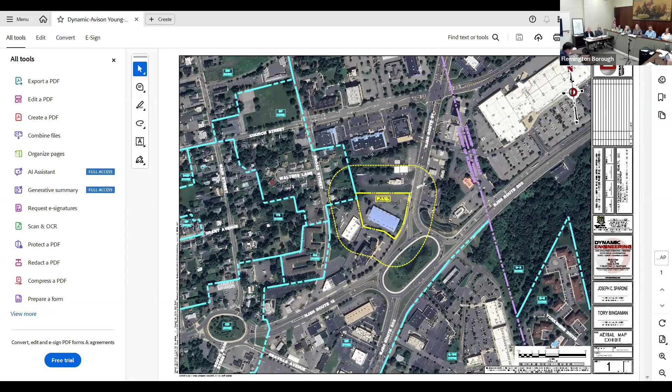So again, referring to this exhibit here, oriented with north toward the top of the plan, what you're seeing is the property in question outlined in yellow with a 200-foot offset to demonstrate proximity to those adjacent uses. The property, as Jeff described, is located at block 43, lot 9.01, at the address 3 Route 31 here in the Borough of Flemington. We are in the highway retail district, and the site is approximately 2.19 acres.

Looking at some of these adjacent uses: to the north we have a Wendy's drive-through. Immediately across Route 31, we have a building supply commercial user. To the southwest, we have the Flemington Circle itself; to the south, we have a commercial professional office development, and a second one towards the southwest. Then in the top northwest corner of the property, we have existing residential to the rear.

In terms of conformance in this existing condition, Jeff already notes some of the existing floor area ratios and impervious coverage relief that's going to be discussed further, but also want to note at this point there are some front yard and rear yard setback variances which are going to be remaining unchanged as part of this application. The site itself is a former Dansk shopping center. The property is currently vacant, run down, and generally unkempt as currently exists.

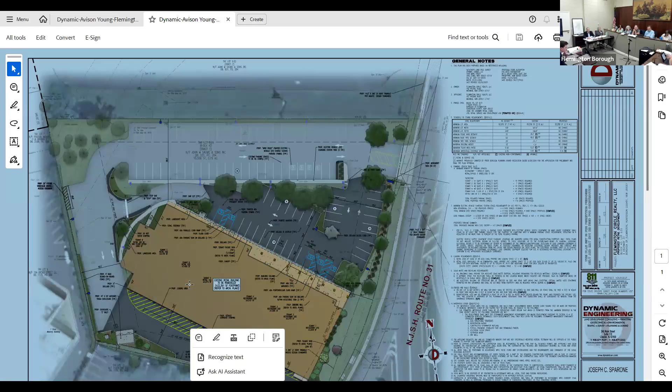In terms of connection to the Wendy's parking lot, what I offer is, I'm not recommending a connection between the parking lots at this time, so vehicles from this shopping center are going to enter into the drive-through. It's in the event that the Wendy's may be redeveloped for something that doesn't include a drive-through, or at least in that area, that there may be an opportunity to connect the lots to give pedestrians or vehicles the opportunity to access the neighboring site without having to go on the highway.

So I wanted to raise that for the board's consideration and for the applicant's reconsideration about connecting to the north and also to the south, in the event that the Plaza One site is redeveloped and of course the grading is redesigned to accommodate access.

I mean, for the rear, we have a 2 to 3 foot grade differential, so are we only talking about the front, the top? I think they should be taken separately. Tory, the engineer, do you want to address the first, the top one, Wendy's, and where the...

I know there's a handful of existing easements already that we'd have to confirm any restrictions associated with, for the rear. Again, we worry about losing parking, that's right, that would be the other concern. Right now we have additional parking on the site, but with this tenant, that's still to be confirmed. We afford ourselves that flexibility here.

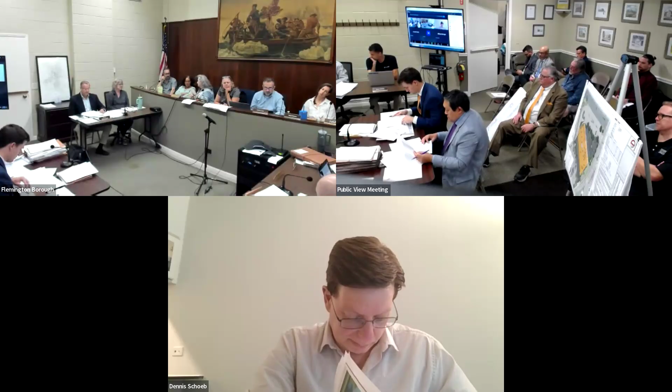No, wait, excuse me, I'm on the wrong section. 13C, number 3B at the bottom. That would be along the lines of, bioretention would be along the lines of the vegetative filter strip.

And we can discuss these one by one and see if any of them are feasible. I guess what I'm just saying is, if we go look at 13A, B, and C, as you've easily outlined, what their three options are. They're not gonna be able to do A, because they can't get it under 50. They can do B in certain situations, which would be something like the garden that they're proposing.

Their position is they did B by doing the analytical approach. I'm questioning that - if they did that, if they checked all the boxes off, did they really qualify for that? Again, I was just throwing that out to the board because we haven't seen an applicant who's just come in. And ultimately, if they can't do anything, then they could get relief from this board from those particular provisions. I think underlying this, they could always seek relief from the 20% reduction, because analytically they did that modeling, so they can prove to us.

Yes, I think if we're gonna rely on that, then I think we should go through the stormwater report and discuss each one - what it is, did you really hit the target, or is there something else you could have done? Again, so it's a little bit of unknown turf here, because no applicant has ever tried to do that before, so they don't have a history on trying to do that.

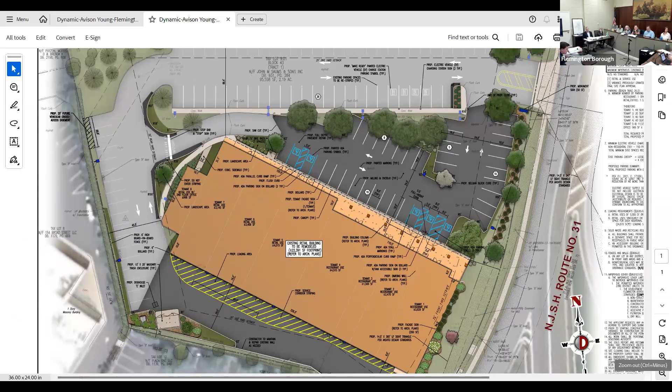Would the applicant consider making a donation to the borough to put other trees in other places instead? Is there a tree fund? There is a tree fund and you have the choice. So if we could have either choice - plant them at an acceptable location, or make a contribution - would that be acceptable? I don't know if we allow you to plant, that's up to the DPW superintendent, whether or not they'll allow you to plant them elsewhere. I would prefer just the contribution. Okay, that's fine, we'll accept that.

And we would like to see - I mean, that's a heat island - if there are places to put additional trees, I'd prefer that as well, just a few would help. Maybe we'll work somewhere. I believe there were recommendations for some additional landscaping, which we were going to use. Maybe work with professionals on that.

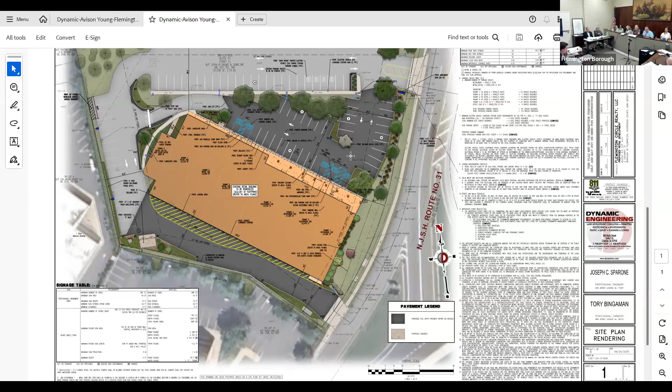So we're very concerned about that, so we'll try - obviously we'll do the best we can to use native species of tree and see how many we'll fit on it. Sound good? Perfect. Dennis raised that and started that conversation, so let's go back to Dennis, see if he has anything else. Nothing else for me. Okay, great, Melissa? I had questions about the plantings, but I think we pretty much answered all of my questions.

Mike? I'm good. Okay, sounds great. Anybody else? Mine were covered, I think, under the engineering report, yeah?

Yeah, so one other thing, item 16 with the roof leaders. You indicated earlier, if you don't have an inclination to want to do drywells on the property, how do you intend to discharge them?

They offered an alternate suggestion. Currently they discharge into underground. They do. Where do they go? We need to confirm, I think it's part of your comment 14, we intended to determine that discharge point for those.

And item 15, what do you intend to do with that inlet that's gonna be sitting at the high point? In rearranging the site, there was an inlet from the original development, I think that was an access point out to 31 that got eliminated when they redid the circle. In their prior plan, it was an inlet sitting in this low point in like 2 or 3 parking spaces. In rearranging the parking in this area, it's now gonna be at a high point, so it's not gonna really serve a purpose.

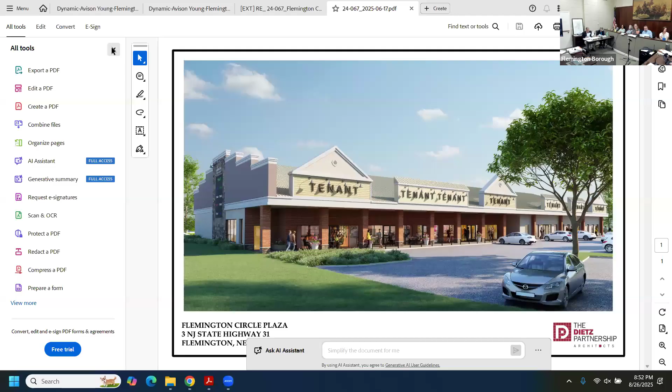So if you could, Mr. Dietz, in the narrative, hit a couple of things: describe what the facade treatment is, what we're looking at, what the proposed renovations are. Also hit upon the signage and the variances that we're requesting, and then confirm the ADA compliance as well.

Yes, I was hired approximately 2.5 years ago by the applicant. I'm sure everybody's familiar with this project and the disrepair that this building is in as we sit here today, so I certainly had my hands full when I took this job on. I think the two major things I'm looking at is this is not just a facade renovation, it's a beautification of a project that's been long overdue for a remodel and cleanup of many issues of just age and wear and tear.

The two main features, in my mind, is the roof change. It leaks, it's a green standing seam roof on this wood truss building. The green style and color came in probably mid-80s and went till about the mid-90s, and I was just a victim of designing buildings with that. I've spent the next 25 years changing it, so I believe I'm offering a wonderful color, it's classic, it's easy on the eyes. It's called champagne. That will be the new standing seam roof that'll go on after we take the old green one off, which will hopefully solve many of the leaks currently in the building.

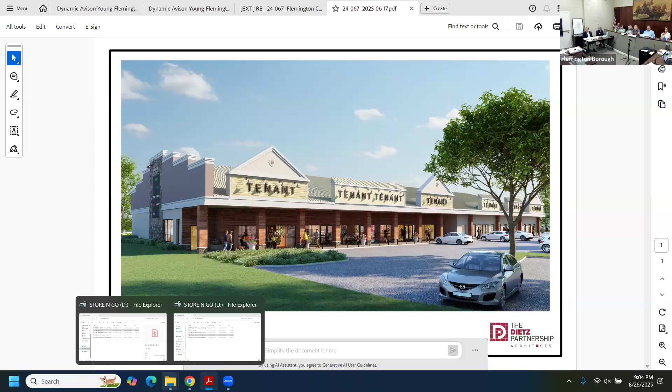Let's mark it. So A6 would be the materials and color samples, and then A7... well, it's actually we've done 5 already. My sheet numbering is always a problem because the art always starts with A. But were these already submitted? No, I think we didn't get these in, these are part of the comments. Okay, so we're going to mark as A6, architectural sheet A5 — or do you want to do A6 first?

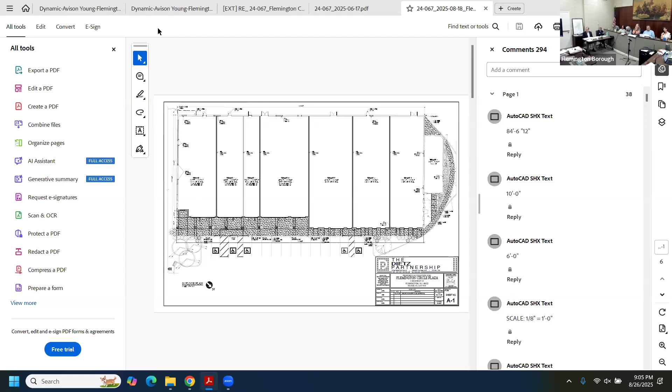So A6 is actually the materials. Yes, so that should be A6. That never happens. Wow, alright, you were prepared. Architectural sheet A6, alright. And then any date on that, A6? Today's date, the 26th. Alright, and then A7 is architectural sheet A4.

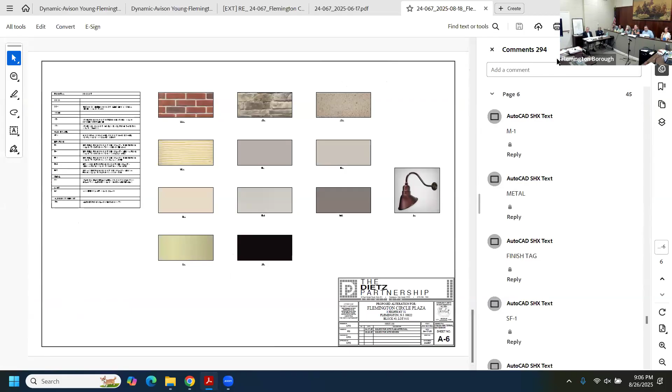It's A4 and A5, the elevations, just with the finish tags on them. So they're the elevations with finish denoted. With finish denoted, and today's date as well. Are those new drawings from the submissions or just updated drawings? They're just updated with the tags, so the elevations are again... are they A4 version 2? We could write that down. No, these were in response to the comments, so we added.

Here's the same front elevation, but with this — this HP1 is this part. But then this same elevation now tells you what the material is. It's brick 1, stucco 1, 2. And what's on the flash drive are these, correct? Correct, so you should have everything.

Yes, so which sheet are you talking about — updated those sheets, or are those brand new sheets? I dated them today. Updated. We updated from the original submission. Correct, so they are updated versions of those, not brand new. Correct. Alright, now you've confused me, because that's entirely different from what I said.

So, okay, A6 is the materials and color samples, also referenced as architectural sheet A6, with today's date as a revision date. The original date was April 17th, 2025, and the last revision date was 8/26/25. Okay, let's do the same for A7. A7 is architectural sheet A4, A5, elevations with the finishes on them, last updated 8/26/25, but originally dated 4/17/25. Okay, thank you.

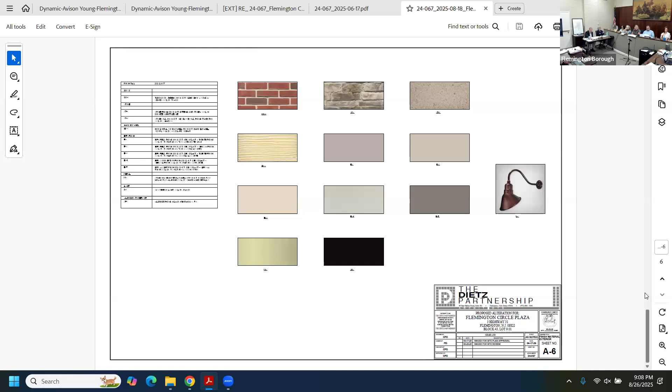Nice, yeah, thank you. I have a couple questions. First, I'm sorry, I missed your testimony regarding the mechanical equipment on top of the roof to the rear — is it that you can't screen it because of the structural loads? Correct. The equipment will remain where it is today? Correct. But was this ever submitted? No.

So Dynamic was nice enough to put the pictures on a board that I didn't have to do. So he has a sheet, sheet 1, dated today, that has photos of the existing center. So if you want to mark that — okay, was that in the photo report?

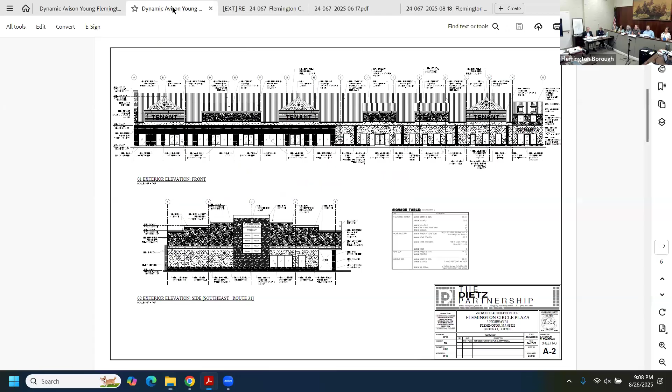They should have been part of that package that was sent. Okay, I have a photo report, they're taken from the photo report. Okay, so then it's yeah, okay, don't have to mark it.

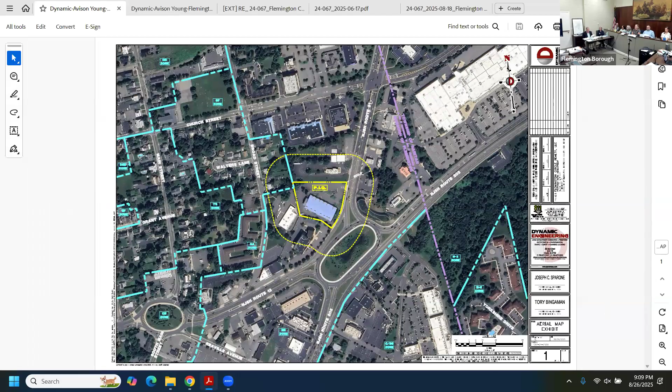As you can see from this photo, it's not... alright, sorry, let's just mark it to be sure. The photos are a little bit different. A8, existing conditions photos, I don't have that on. I don't think so. Here, just one second. Is there a date on there today? Today's date. Alright, camera, tuck the other way, I'm moving.

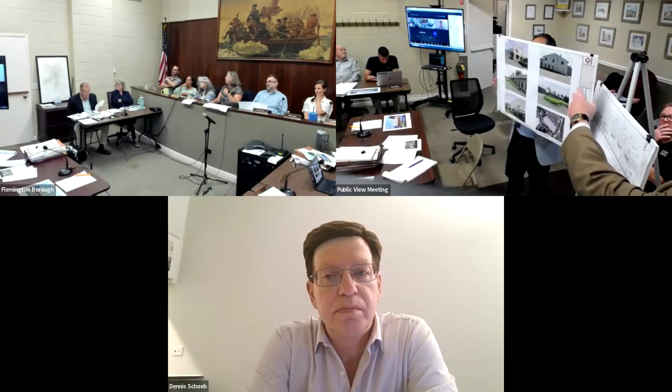Photo 1, upper left, shows the existing parapet, then it shows all the rooftop units sitting on the platform. You can see they're way lower, 3 to 4 feet below that parapet. We're going to reuse those platforms and maybe add a few more when we put the new tenants in.

My testimony is they'll be screened just like they are today. So unless you're directly behind this project on the backside, yes you'll see the units, but from the parking lot and most of the street you will not see these units.

Are you unable to provide screening along the rear of the building because of that structure? Same reason, correct. I could not run it continuous and let it stop, you'd see through, you can see how many there are, and we're going to have at least that many going forward.

But would your testimony also be that they wouldn't protrude above the ridge of the roof? Correct, they'll be contained within, visually, the roof. And always behind the parapet - that's what I did, I updated this parapet, played with the height.

So with this parapet in place, you won't see them from that part of Route 31. They're lower than the roof, so you won't see them from the Wendy's side forward.

What about the residents who live behind it? If they're directly behind, they're going to see exactly what they're looking at, or have looked at, for the past 20+ or 30 years.

They don't protrude above now, so they're within view. Also, the residents' view is closer to the diagonal, I believe. Yeah, they won't see the rear of the building. They're closer to the Wendy's side, so they shouldn't be seeing it now, and it won't affect them.

Again, that was my first inclination, before I knew it was a truss - I was going to run a whole new parapet across the front and the back and put my sign in. We got inside, found out it was wood truss, the structural engineer said nope, not happening. So we came up with a different design.

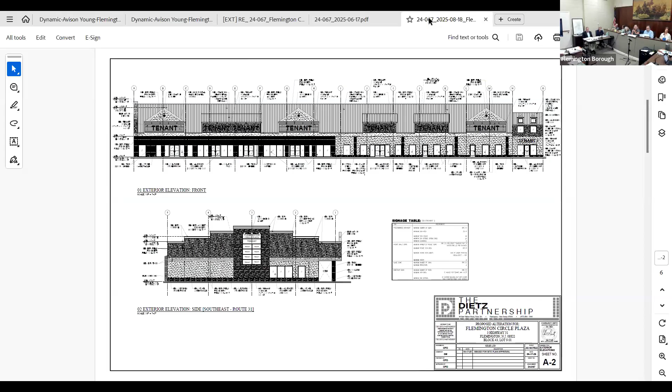For the maximum facade sign, there are several requirements. They are permitted 2 signs per tenant, and they comply with that. They have 1 sign per tenant facing the parking lot, and then an additional sign facing Route 31, so they're compliant with that. When you say additional, facing 31, are you talking about the one shown on the side of the building? Yes, the wall sign — it sort of looks like a freestanding sign, but it's on the facade.

In terms of facade area, the ordinance permits up to 100 square feet. Facing the parking lot, they have 396 square feet. Facing the circle with Route 31, they have 201 square feet — that's the individual sign with all the tenants listed. The parking lot side has obviously individual signs for each tenant. For maximum facade sign length, it's a maximum of 50% of the frontage of the tenant space, and they do not comply — but only facing the parking lot, for both length and size.

For maximum facade sign height, it's a maximum of 4 feet, and that is non-compliant facing Route 31. So to break it down: for the parking lot, it's the area and the length of the signs; for facing Route 31 or the circle, it's the height and area of the sign.

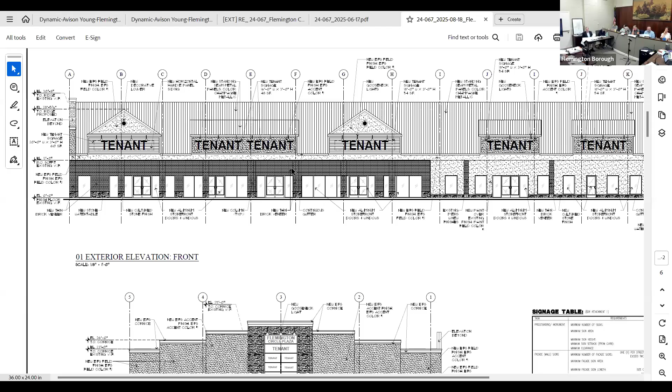I'm clear about that. The dotted box is what we're allowed, we just didn't stretch the proposing tenants to be able to have signs that fill the entire box. And the measurement is based on that box. I understand, but the distinction I want to make for the board is when you look at those words 'tenant' over each storefront, there could be a larger sign there, filling the entire box of the parapet, not the whole thing, but the dash line around the word tenant.

So I think the board should take that into account. It is shown on the plan, yes, but the calculation is for the dotted box. So the sign doesn't get any bigger square footage wise, it's just that we don't like to stretch it because then it gets asymmetric.

Kind of, not to have too many letters. Yeah, the tenant could have 8 letters. Yeah, exactly, something like that. But thanks for pointing that out, because my concern is that's assuming the tenant would come in with a rectangular sign. If they came in with something else, what then?

One of the other questions I meant to raise was the type of signage proposed on the front — is it proposed that all signs shall be channel letters consistent with what we see here? Yes. Good, because that's going to mitigate the size of the sign, since you don't have a big box. You have a height restriction, so they can't go above 4 feet.

We didn't even design those mansards to be tall enough. But you're proposing individual letters, not a box. If you have one tenant with 6 words in their name, they still have to fit in that box. Yes, I just want to be clear, it's always going to be individual letters, as opposed to a single sign panel that's fixed. I don't like box signs.

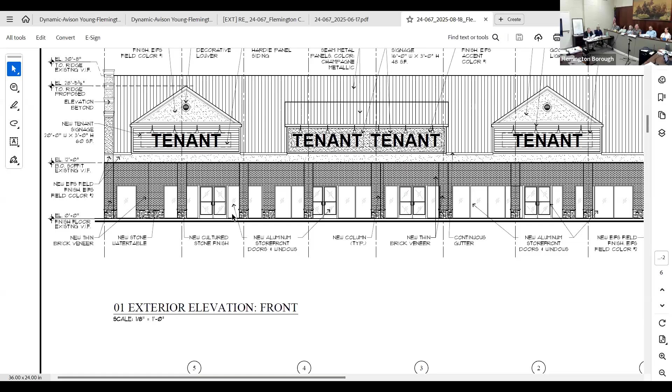I'm more willing to deal with the parking lot signs, because I do feel like they're trying to be conforming in terms of a tenant. The circle facing building facade is very large, and their submission drawing here has 9 tenant slots.

If we bring out testimony, it's only gonna be 8, so that could be scaled down potentially. I do like what they're trying to do in terms of bringing all the signage into one thing.

But I just don't know how they're really committing to reducing the size. And if you're coming off of 202, and that's a long stretch, and when you look at the Google view, there's big signs all over that front right now.

Just trying to compare. We have to look at what's before us, we have to look at that proposal. I mean, it is quite possible.

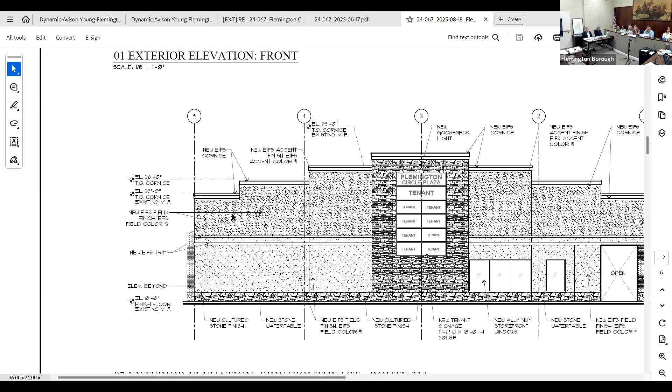They are trying to maximize, trying to be consistent across the board with each tenant, and make the box the max that it could be and ask for that relief. It's quite possible that they're gonna have people come in that are gonna be less than that.

So when you measure, Beth confirmed, you measure the box around the lettering, so if their lettering is smaller, it could conceivably be less than 396 square feet. We don't know, but it could be, you see what I'm saying?

These wouldn't be subject to individual tenants having to apply for their sign, this is going to be standard. If you approve this proposal, they will come in and get a sign permit to construct in accordance with your approval.

If you gave an approval that said each sign for each tenant that came in would have to either be conforming overall, or they'd have to get a variance, that's something different. The board may want to include conditions about any sign design requirements that are important to you, like channel lettering, consistent coloring, no logos facing the parking lots, but you should think that through, especially in the context of the relief being proposed.

But is it all or nothing? Is it 400 feet or 100 feet? There's nothing in between.

I would recommend that the board identify a square foot that you're comfortable with. If it's not what they proposed, it could be 150, 200, 300 feet, whatever the board was comfortable with. I'd definitely support something bigger than 100 feet, but this is a dead stop area. Nobody's doing 40 or 45 miles an hour.

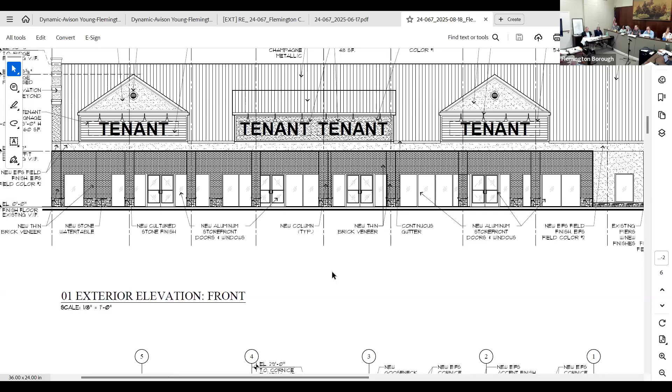If I can make one other comment, if you look at the rendering before you and compare it, this obviously looks bigger because it's a big blank white. I'm not proposing big blank white plexiglass panels like you normally see. If you look at my rendering, we're doing a very subdued black background and allowing the tenant to put their colors within that, so it's going to read very differently, not this sparse looking big white box that stays vacant until you get a tenant.

But is the font going to be restricted like it is in the parking lot? I hadn't proposed it. I didn't think your ordinance mandated it, so I never liked to. I just wonder. Yeah, I don't like to push things like that because it becomes too monotone. Like the center that has the blue and the cream - blue is one of the worst colors you can ever pick for a sign, because you can't read it at night and you can't read it in the day.

What about the other two compliant signs that can have their logos in their colors? If it's allowed, we could, but my demand, and what I thought your ordinance said, is if I stay within this square footage, this height, and within that box, they can put their logo next to their sign. You know, Starbucks doesn't usually do that - I always use them as an example because I do a lot of them. They would probably just put either the Starbucks name, or they're just gonna put the mermaid. They don't usually put the two together.

And to the chair's point, you said this is standard, channel letters with the tenant - that's not what I'm hearing. Yeah, there's channel letters. I'm not gonna say one can't use one font and another person use a different font, as long as it's a channel letter. But they don't need to use the font at all, if I'm hearing you - they could just put the mermaid, just the logo.

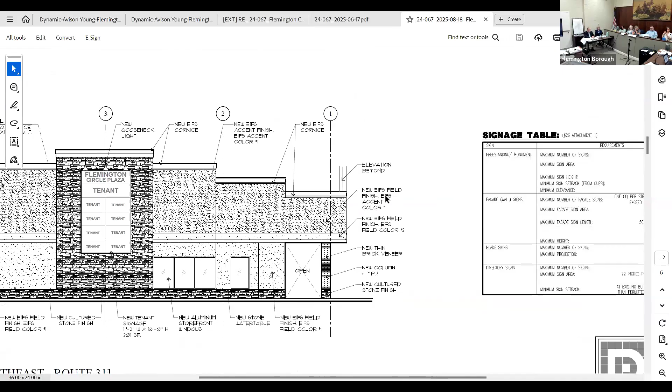Any other questions? Yeah, Mark, I got a question. A monument sign on 31 - that's gonna have signs on both sides, correct? Just so it's on both sides, that's 100 square feet, so that's 2 times 50, yeah.

And that's just re-rendering that, is that right? Refacing it - you're not building a new one, just facing what's already there, is that correct? No, that's a new one. We're taking the old one out and this is basically going relatively in the same spot. Does that stone match the sign, the stone on the side? Yes, as does the brick.

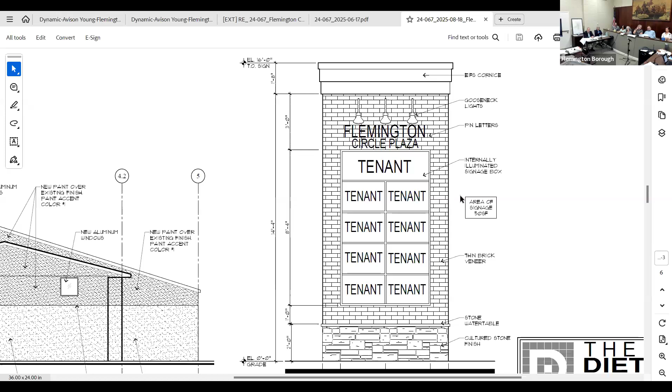Whatever we've chosen will bind all the signs to these colors, same materials, same trim at the top. Oh, and you have the sconces above. Yep. And this one will only shine on the Flemington side.

For the record, I'm just looking - is this compliant? Oh, it's compliant, yep. Sheet 3 of the submission. Thank you. Three, oh yeah, that's right - Exhibit A3.

So are we saying when we're looking at that one, that we want to just have 8 similarly sized ones and remove the big row? Well, I mean yeah, I think that's right - if it's going to be 8, I'll change the top row and split it, then remove the bottom row, which will get you 8 versus 9. And would you make the same change on the facade sign as well, the side facade sign? Yeah, I will shrink that too, correct.

So this may or may not be acceptable for the board, but I do think the applicant is proposed to get rid of a portion of the sides of the sign facing Route 31 for facing this wall for the excess tenant space. And then the center name is not part of the sign panel, it's gonna be individual letters on the stone, similar to or consistent with what's shown in the rendering. And we put a box around that as well for you to calculate it.

Yeah, so it's still well beyond what is permitted, but I think the reduction and the plaza name being in individual letters rather than part of the sign panel, that'll help mitigate some of the height. Whether that's enough for the board remains to be seen, but I do think you should take that into consideration. It reads differently than the tenant.

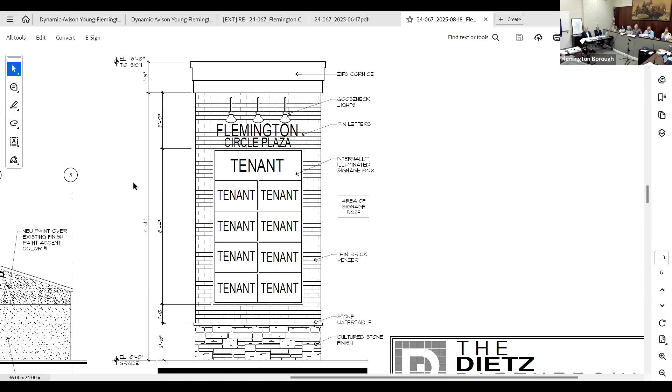What is gonna be on the freestanding sign? That's the one we're showing now. This is the freestanding one, Dennis? Yeah, this is the freestanding one. And this one meets the requirements, right? Yeah, that's the testimony, yes.

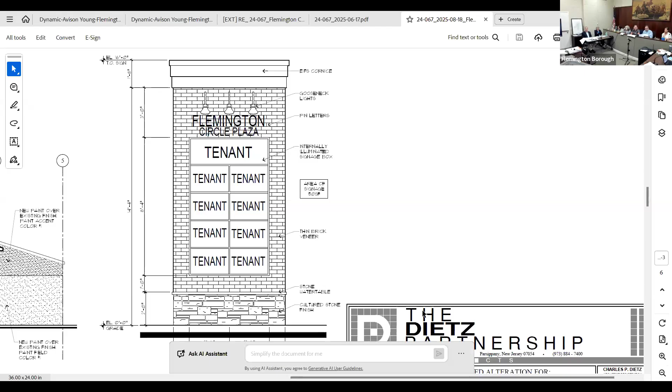So the freestanding one is gonna be facing like Route 31, right? Yes. Okay, and then I don't get why the wall one needs to be so big then. Well, one of the reasons you have a monument sign is to identify where the driveway is to access in. So I think there's a bit of a distinction between the facade sign we have and the actual monument sign.

Does anybody have any other questions for this, anybody on the board? No. Any members of the public have any questions for this witness? I don't see any hands online. No, okay, thank you.

Let me put the next witness. My next witness will be the traffic engineer, Mr. Corey Chase from Dynamic Engineering.

Could be more, yes. I actually feel pretty good.

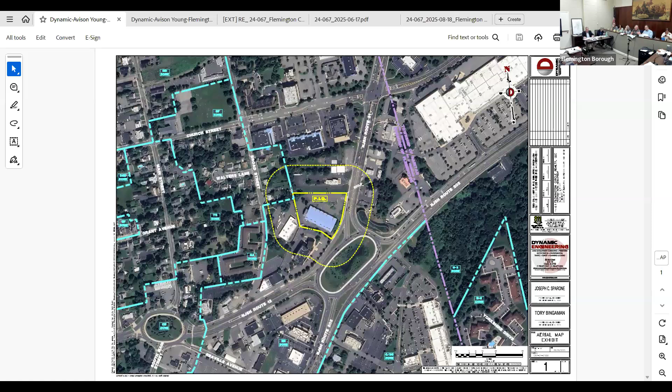Good evening, everyone. Corey Chase, first name Corey, last name Chase, principal of the firm Dynamic Traffic, licensed professional engineer in the state of New Jersey and five other states. Bachelor's of Science in Civil Engineering from the University of Massachusetts, and I've been qualified as an expert in traffic engineering before over 130 municipalities throughout the state. I would ask you to be accepted as an expert traffic engineer.

Anybody have any objection? Thank you. So, Mr. Chase, could you mark into the exhibit the traffic report that you prepared, describe in the narrative the sufficiency for circulation, ingress, egress, the number of parking spaces we're proposing above the required for the zone, and also confirm DOT has a letter of no interest, I believe.

Yes, certainly. So hold on really quickly, there's a traffic report we're gonna mark in evidence that was not provided in connection -- I believe it was provided, but just for the record. Did you see that? Yeah, it was. Okay, I'm looking at your report, I didn't see a reference to that. Yeah, it's on the front, the third bullet point. Ah, there we go, see, it wasn't called the traffic report. That's good, it's a little 10 o'clock at night.

Go ahead, I'm sorry. No problem.

As Jeff mentioned, we did prepare a parking and circulation assessment dated April 14, 2025. It reviewed the site access, the circulation, and the overall improvements to the site as a result of the redevelopment.

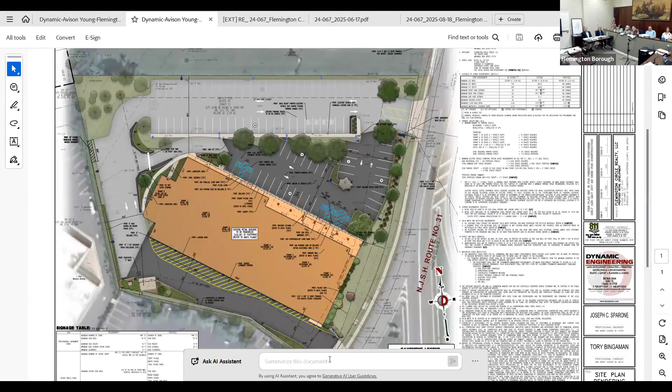I was just wondering, briefly describe the deliveries. I guess they enter the northernmost, and then they would have to exit from the southern? Yeah, that's correct. So any deliveries would enter through the northern access point, the full access driveway. They'll circulate in a counterclockwise manner towards the southern building facade. You can see there's some yellow hatch striping directly adjacent to the southern building facade. There are doors, all employee doors, man doors towards the rear of that, so they do have direct access to load from the rear of the building. They would have to exit onto the ramp to Route 12. Fortunately, there is the circle immediately to the west of that where they could then execute a U-turn and head back towards 202 and 31 if needed.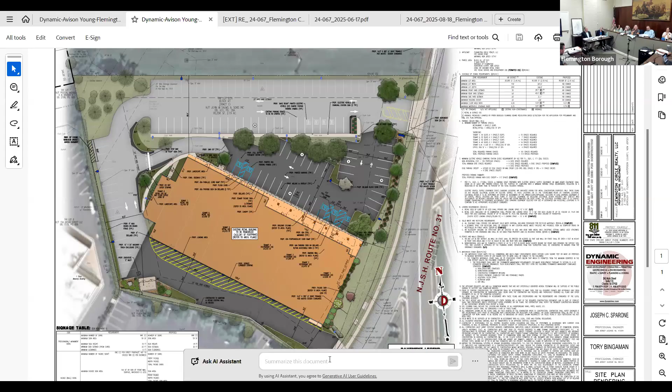Thank you. Okay, Melissa, online, anything? No questions for this witness. Okay, thank you. And then Dennis? No, I'm good, thanks, I think that's it. Okay, so any public questions for this witness? Any public, anybody online? Don't see any hands raised, no hands raised. So that's all for this witness.

My last witness, Mr. Joe Sparone from Dynamic Engineering, will be a professional planner this evening. Good evening, you should be all by yourself. Yeah, Joseph Sparone with Dynamic Engineering, a graduate of Rutgers School of Engineering, professional planner in the state of New Jersey, and have been accepted as an expert in professional planning before various other boards. And perhaps the board accepts him as a professional planner. Any questions or comments? No, thank you.

Sparone, could you take us home with the justifications of the variances, and take us through it please. Yeah, I'll keep it brief given the hour tonight. Basically what it comes down to is you have the existing nonconformities that they're requesting to carry through, that's between the rear yard and front yard setbacks that are not changing.

The maximum floor area ratio and maximum impervious coverage will both be reduced compared to the existing condition. So the request is to continue to carry those variances through with this application. The remainder of the variances are in regards to the signage, and the accessory structure was the final discussion there.

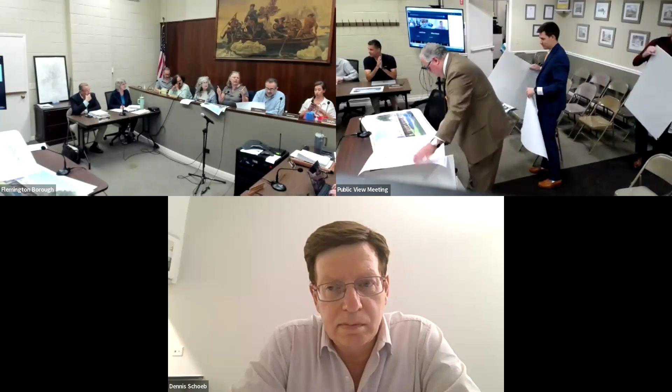Item 10 is the bills which were distributed, thanks to Carla here with the whole packet. I love this whole meeting packet, it's all there, it's all in one page. Otherwise I lose them all over my email stream.

Alright, so can I get a... I'm stuck at this point, move on to the bills. Yes please, that's what I'm... okay, make the roll please.

Ms. Whiteside, yes. Ms. Skipper, yes. Ms. Swingle, yes. Mr. Swinger, yes. Mr. Ethel, yes. Okay, excellent, now item 12.

Do you want to enter executive session? I will make it very brief. We need a motion to go into executive session to discuss status of litigation involving the Flemington Circle billboard and potential litigation options regarding the same. We will not be making any formal determinations during executive session, and we will not return back to public, so the motion is to close the public session and go into executive session.